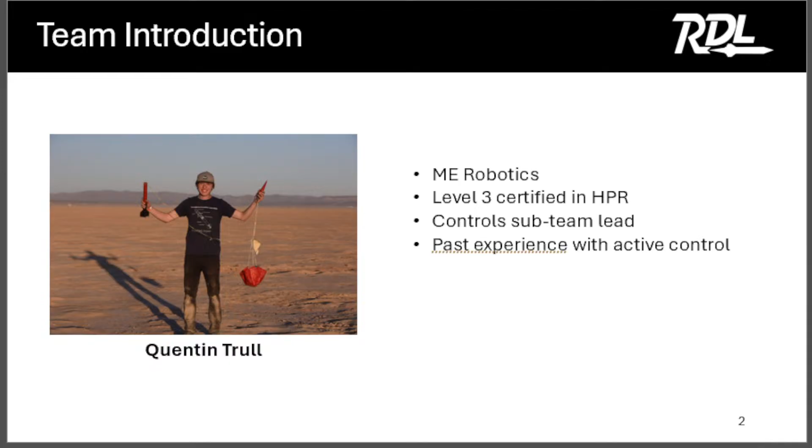And if you don't know me, my name is Calvin. I'm a student here at Embry-Riddle studying cyber intelligence and security. I have a pretty extensive programming background, programming for different projects, mainly ones that Quentin over here has roped me into. For this project, I wrote the flight software that controlled the flight. I have past experience with active control, and for this next season, I am the 2026 team lead.

All right, so what is the IREC competition? IREC stands for International Rocket Engineering Competition, and it's where a bunch of colleges all over the world come together to try and solve a common goal and compete and see who wins. There's a few altitude categories, so you can compete in 10K, 30K, or 45K. The altitude is your target. The goal is to reach a target altitude without going over or under it. So if you pick any of these target altitudes, that's what you're going to be shooting for.

There's also 2-stage categories for 30K and 45K. I don't remember if there's one for 10K or not. But in addition to all the altitude targets, there's also propulsion categories. You can compete in solids, hybrids, liquids, and also SRAD. SRAD stands for Student Researched and Developed. So you can do an experimental custom motor of any of those propulsion types in addition to the commercial ones. And the goal is to reach the target altitude without going over or under. You get a higher score if you're closer to it in either direction.

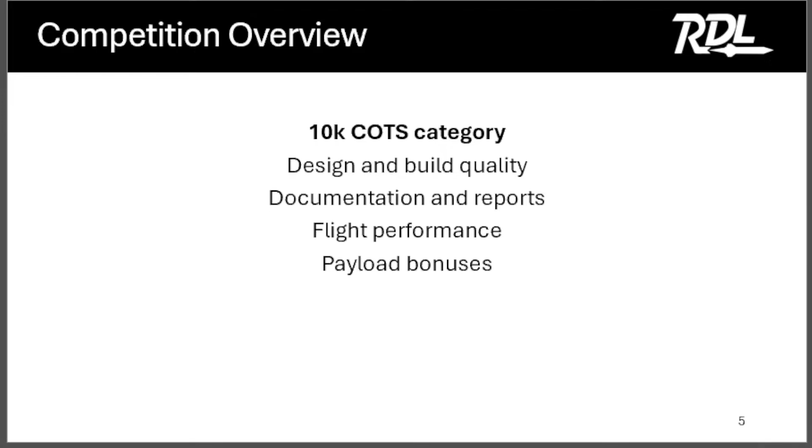All right, so in 2024, Embry-Riddle Prescott competed in IREC. It used to be called the Spaceport America Cup, but it's no longer at Spaceport America. And they used passive control. So it's just like a regular high power rocket. It goes up, you change the weight of the rocket to try and reach the target altitude, and you really focus on making sure your simulation is high quality to see how close you can get to the target.

Can I interject one thing? One of the things about solids: the performance of that rocket is highly dependent on the temperature of the grain itself. Yep, all sorts of variables with it. Some advantages though is that it's way simpler. So there's not a whole lot of failure points, and a lot of people, especially teams that are new to rocketry and don't have a whole lot of experience... that doesn't really apply to us.

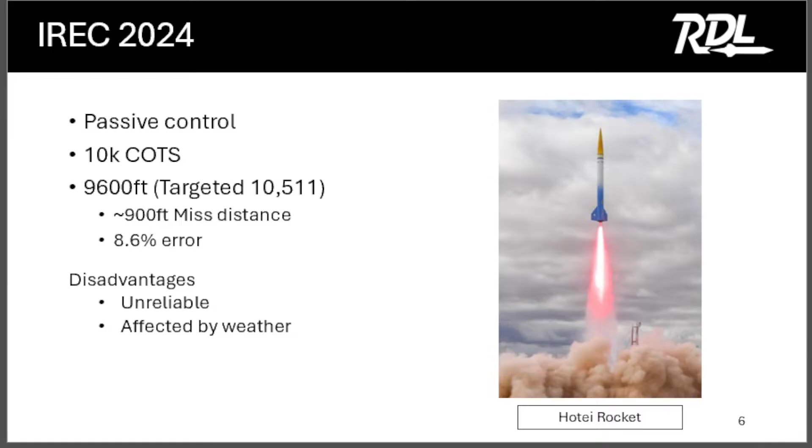It's really good for those teams because they can kind of get into high power rocketry that way. For the 2025 competition, we decided to use an active control system. We were still targeting that 10,000 feet goal, and we were still using a commercial off-the-shelf motor. Our flight performance, though, was significantly better over the 2024 season. We reached an altitude of 9,756 feet, and we were targeting 9,800 feet. So that's a very significant improvement.

We were only 44 feet off of our goal, and the error for that is about 0.45%. Some of the disadvantages to this is obviously adding an active control system. There's a computer on the rocket. That adds a lot of complexity. There's also more failure points. If any of those things fail, then the whole flight can be a failure.

But some of the advantages, it's so much more adaptable. It can adapt to changes in weather as you go up in the atmosphere, and also your motor performance. And in addition to that, it's repeatable. After the system is tuned, it should be able to fly to the same performance level basically every single time. And on the side, we have a picture of Brake Check rocket, which is this year's rocket.

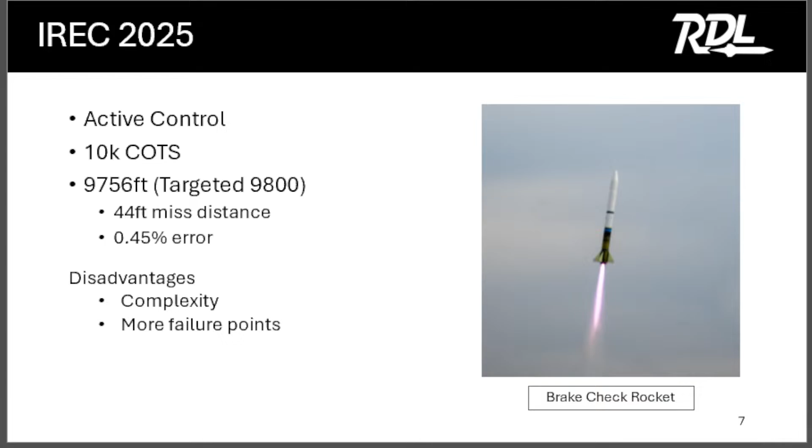All right, so this is an image of this year's IREC rocket, the 2025 IREC rocket. It's in a program called Open Rocket. How many people here are familiar with Open Rocket? Okay, great. So most of you. It's what you use to simulate high-power rockets. I'll talk about it a little bit later. We broke the rocket up into a bunch of subsystems. So I'm just going to kind of go over what the subsystems are.

The first one is payload. So this is to compete in the payload competition. The payload was located inside of the nose cone this year. The next one is recovery. So recovery is located right underneath the payload. That's where you have your recovery electronics, your drogue parachute, main parachute, and making sure that you get the rocket back in one piece. Structures, it's kind of everywhere because it's the structure. And so that's just the airframe, the fins, all the couplers, all of that stuff is handled by the structures team.

And then the control system, it's this thing. It's located right above the motor. That's so that when the air brakes open, it doesn't affect the rocket stability as much as if it was further forward. And then, yeah, the last one is propulsion. So that's the motor. In this case, it's a commercial motor. We did initially try to make a SRAD motor, but we had a mishap, so it didn't end up happening at the competition.

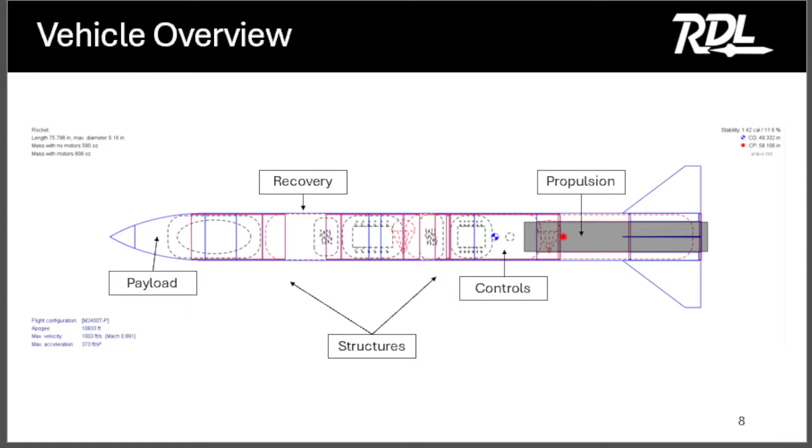For our payload section, we had a live video downlink system set up. It uses an FPV drone camera to capture footage and then a series of antennas to beam it back down to us on the ground. This is an improvement from our 2025 setup. We're using better cameras, better antennas, stuff like that.

Some of the challenges for this system are maintaining connection. The camera is very small, that is the entire thing, and it has no onboard storage. So if we lose connection, we just kind of lost that footage. Also, the camera can overheat and obviously shut down, and that's not great. And unfortunately, this payload was not compliant with the competition rules. We were a little bit underweight, so we lost some points in the final competition for that.

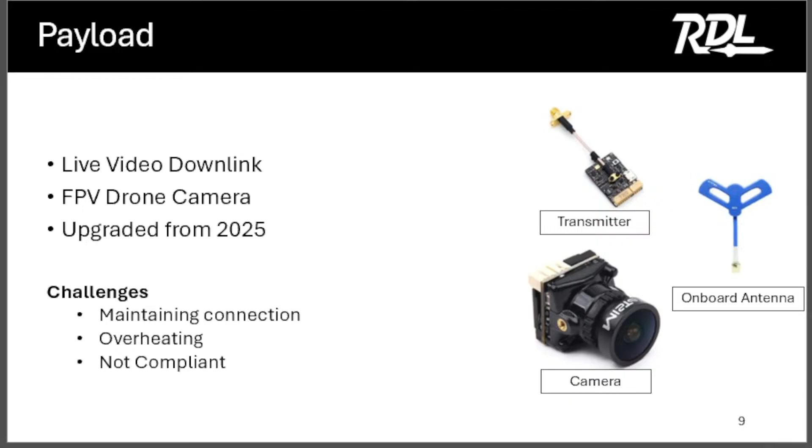All right, so for structures, the big thing that made structures difficult was that it was all student researched and developed. So we made all the body tubes and a lot of the fin can section out of student researched and developed parts, and that added a lot of complexity. The requirements were it needed to stay above 1.5 calibers of stability. So if you guys haven't done it already, you'll learn that that's the distance between your center of gravity and your center of pressure, and it's measured in body tube diameters. So in this case, those two values need to be 9 inches apart to be compliant to the rules.

It also needs to withstand the operating stresses. So it's a rocket, it goes pretty fast. This one, I think it went about Mach 1. So nothing outrageous, but it still has to be able to handle that. And it needs to be constructed of lightweight materials. That's so that we can use a smaller motor so that we don't have to spend as much money to do each test flight, because motors get really expensive at this scale. It's like $600 or $700 a flight.

Some challenges that the structures team faced: it was all new build techniques, so they had some bumps in the road working with these composite materials. There was also some fin damage during some of the test flights that they had to repair. And yeah, SRAD manufacturing is pretty difficult. So they had a multitude of hoops they had to jump through to make that happen.

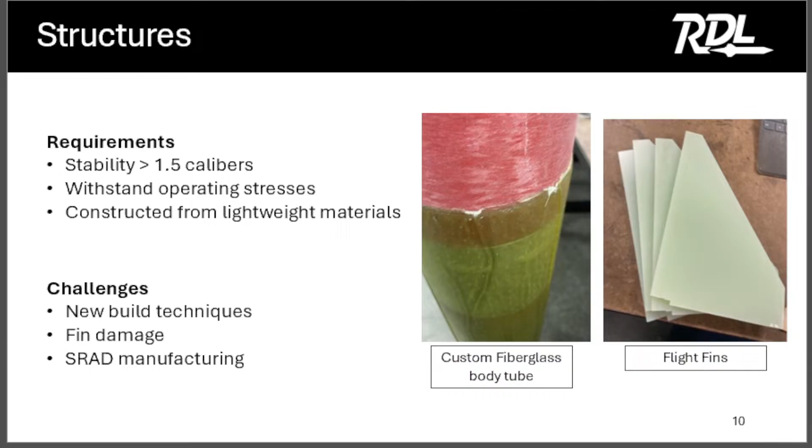All right, and then for the recovery system, some of the requirements are it needs to be dual deployment. Does anyone here not know what dual deployment is? Okay, great. So dual deployment is when you deploy a drogue chute at apogee, which is the highest point of the flight. That's a tiny little parachute that makes sure the rocket doesn't accelerate when it's coming down. And then when you reach a certain altitude, it deploys a big parachute. That's so the rocket doesn't drift as far away, because if you deploy this giant parachute at 10,000 feet, you're going to be walking like 5 miles to go get your rocket. So that's one of the competition requirements.

And that's so that you can find your rocket, because especially at IREC, you're not able to just immediately walk out to go get your rocket. You have to wait. In our case, how long did we wait? I think we waited like 5 hours from once the rocket got on the ground to actually go pick it up. Yeah, and if you don't have GPS coordinates, it makes it really difficult to find the rocket. And also you want live telemetry during the flight. You get that from the Featherweight GPS and from the TeleMega, which is a fancy altimeter that's super expensive and beams down telemetry data, so you know if the parachutes have deployed, how fast the rocket's moving, and all that fun stuff.

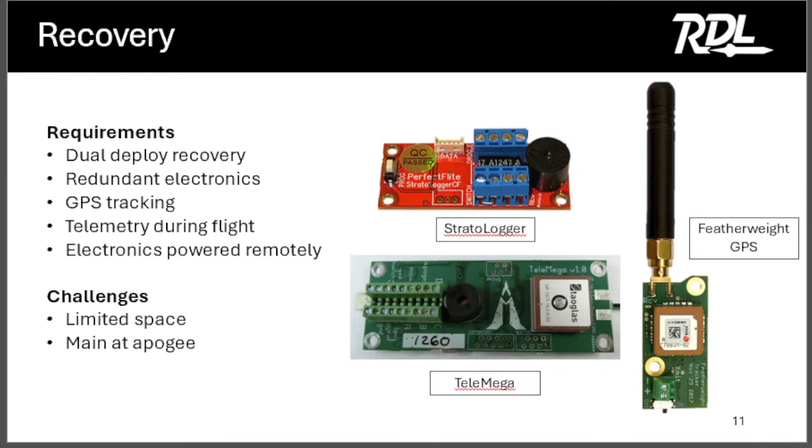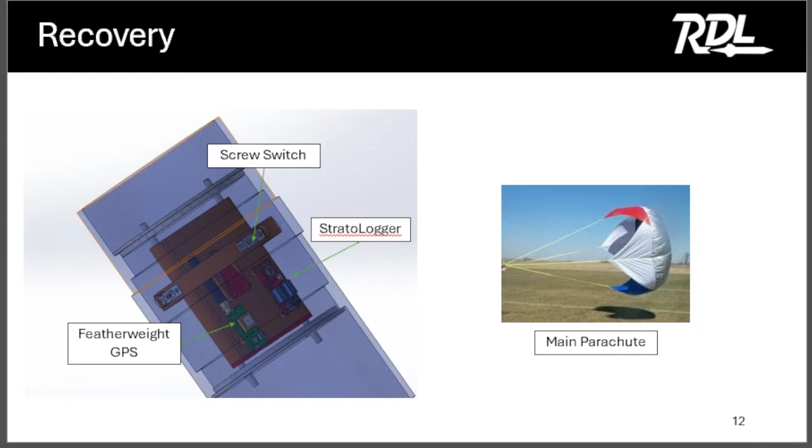For our propulsion system, we were initially wanting to do an SRAD motor. That's where you make your own motor, pour it, test it, do all that fun stuff. But unfortunately, we had a mishap during testing that forced us to switch over to a COTS motor. The requirements were to bring the rocket to above 10,000 feet. Because we have an active control system, we want some margin for it to actually do its job. So we have to be simmed to go above 10,000 feet, or in our case, whatever our target altitude was. We are using a COTS motor, and we need a thrust-to-weight ratio of greater than 5. Thrust-to-weight ratio helps a lot with the control system because it makes sure the rocket goes up straight, because all the equations we're using assume that the rocket is going relatively straight up.

Some of the challenges that this sub-team faced was obviously that testing mishap that forced us to switch to a COTS motor, and then also motor availability. One of the big appeals of an SRAD motor is that you can make them and build them for far cheaper than buying them. As Quentin already mentioned, they are around $500 to $600 each, and if you're buying them, that severely limits the number of test flights you can do. And obviously you want as many test flights as possible. There's also a shortage right now because military contracts exist and companies like those more than the hobby.

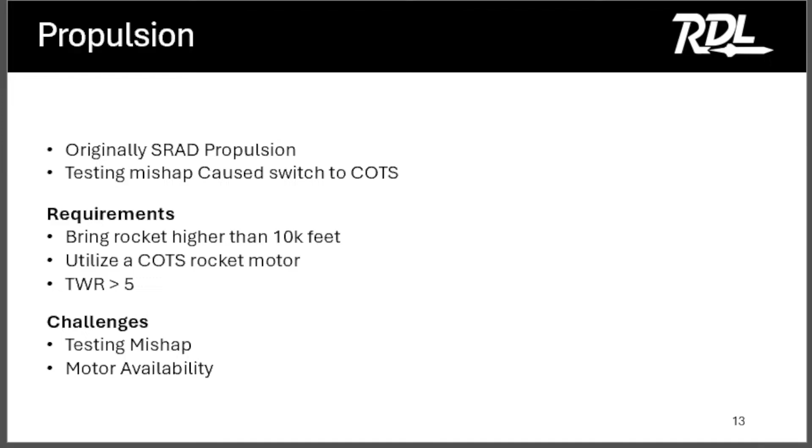Does anyone have any questions about what we've talked about so far? Quick questions.

What motor do you guys use? We use an M2400. All right.

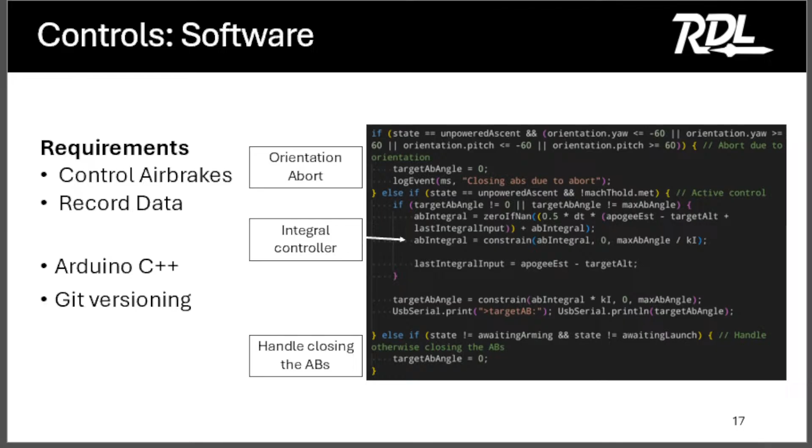We estimate our apogee, we track our orientation, we do some other orientation math. We handle state change as necessary. We'll talk about that in the next slide, I believe. And then we do any of the other extra stuff. So that's logging data, sending down telemetry, and doing state indication.

On our board, there's a buzzer and an LED, both of which are used to tell us humans on the ground what state the board is in, which allows us to make sure it's safe. So for example, if it's in flight, it will be beeping a specific sequence and the LED will be magenta, versus if it's on the ground waiting to launch, the LED will be green with a different beep sequence.

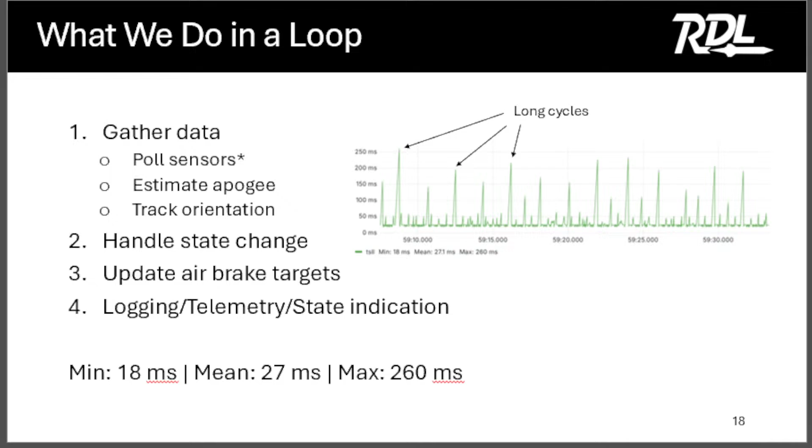Moving into state change, our first state is boot up. It's what we do at the very beginning when the flight computer turns on and begins its life. It sets everything up, and we do that in this setup state. Then we move into awaiting arming. This was added so that when the rocket is on the rail, it doesn't accidentally detect launch, which is what we saw in some of our test flights and other times using this board.

So at this point, it's open for serial debugging. That means we can use that radio and send it commands and do some debugging stuff, or we can plug in a USB and do those same items. We also start logging here. We log for the entire duration that the flight computer is on, just so we don't miss any data.

Moving into the next state, we have awaiting launch. So after somebody has manually sent a command over and armed the rocket, it is now ready to launch. It's trying to detect that. We're still doing data logging here, but after an acceleration or altitude threshold is met, we've detected that we've launched. So here we are also logging data until we detect burnout. This requires a time minimum, and it requires our acceleration to be lower than a threshold, or it defaults after a timeout.

After this, when we're in unpowered ascent and our speed is less than 0.5 Mach, this is where we're actually controlling the air brakes. This is where we're doing all the fancy math, opening them, and trying to hit our target altitude. Once we reach our apogee, which is the highest point in flight, the computer detects that and moves into the descent state. Here we make sure we close the air brakes. This is detected at a time delay, and it makes sure that we don't accidentally get the air brakes tangled in the parachute or any of the other lines that are being thrown out.

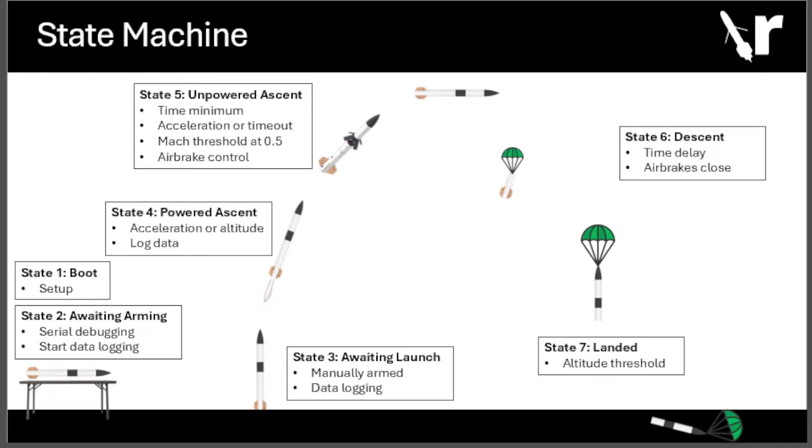And then finally, last state is landed. This one isn't technically necessary for our application because we don't really do anything different between descent and landed. It's detected over an altitude threshold, and it's when the rocket is on the ground.

All right. Now moving on to the hardware, which is right here, so it's easier to talk about. Requirements for this: the air brakes needed to deploy symmetrically. Can anyone here imagine why that might be a problem if they deployed not symmetrically? Yeah. So they pitch over, and that's not good. We have experience with that here at Embry-Riddle, unfortunately.

They also need to fail into a safe state. So the reason we have these brakes that come out like this is so that if something mechanically fails, they will force themselves shut. They won't stay stuck open and potentially cause that. Question, is it air loads that'll force them shut? Yeah. I'll talk about it in a second, but we did the simulations and found that the brakes will experience upwards of 80 pounds of force just from drag. So it's quite a bit.

And also the rocket needs to stay stable. So when the brakes open, you don't want the rocket to go unstable because you're moving your CP, and that's bad.

And so revision 1 here on the top, we originally were using a stepper motor, which is really good for knowing what the position of the brakes are and moving it super precisely. But we learned that the stepper motors aren't actually very strong, and 80 pounds is more than we were expecting. So we switched to a DC motor, which is what it is on now, and it's much stronger, and we'll talk about that in a second.

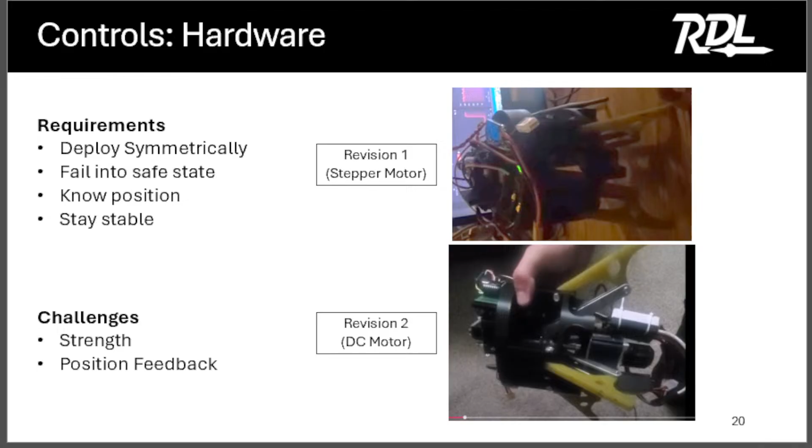So, anyways, going into the control logic now. Buckle up because this is where things get kind of intense. This is our control loop. First, we estimate what the apogee is going to be. So this is happening after the motor's burned out. We're coasting through the air. It's a lot easier to do physics when there's no external acceleration in the form of a motor. So we wait until that's done and it's coasting, and estimate what we think the apogee is going to be, because we want that to be 10,000 feet. So we need a reference point.

We subtract the target from that and that gives us an error. So if we're expecting to go to 10,500 feet, we subtract 10,000, then our error is 500, so it's positive, and we want to move the brakes in a positive direction to counteract that. That error goes into what is called an integral controller. Does anyone here know what a PID controller is? Sick. So this is like a PID controller without the P or the D term. It is just an integral.

For anyone here who doesn't know what that is, the integral takes the error and builds it up over time. So if you have a bunch of positive error and you're moving your actuator and the error is not going away, it'll move the actuator more to try and make it go away. So that's how our control logic works. It's pretty simple in this application.

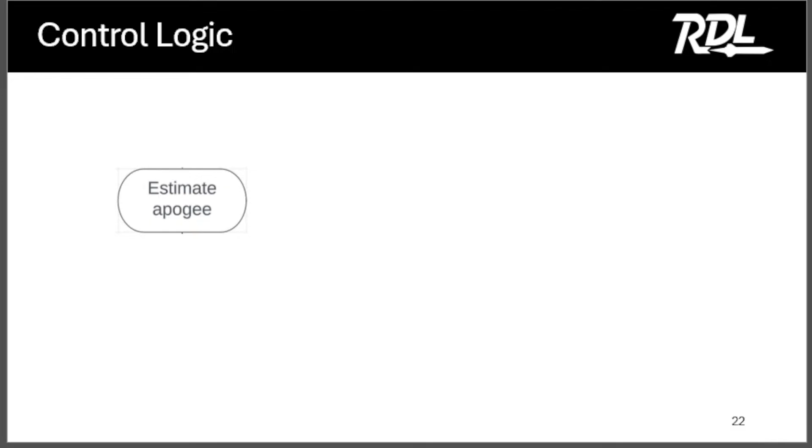Okay, now, how do we estimate our apogee? This turned out to be one of the most difficult problems to solve, because there's a lot going on with the rocket and you don't want to make too many assumptions; you want it to work in different conditions. So we used this equation to estimate our apogee, and I'm going to go through how we got each piece of this equation so that we could do the math properly.

So this is apogee. That's labeled incorrectly. This is the final altitude. So that's apogee, the final altitude. You take the current altitude and add it to the rest of that, and it'll give you your expected apogee. Burnout mass, we can calculate this on the ground before the rocket flies, so that's just a constant.

Current altitude, we collect this from the StratoLogger. So this is the commercial altimeter. This is where we are relying on the commercial altimeter instead of our altimeter, and that's what makes it so that we can get a more accurate score. Because it does not matter how close you actually are physically to 10,000 feet. Your altimeter just needs to think that you're at 10,000 feet, because that's how they score it.

This is gravity, everyone's favorite constant. Oh, by the way, we're in the metric system because it's better than the imperial system. Don't mix your units. Yeah, don't do that. We had a lot of problems with that. That's bad.

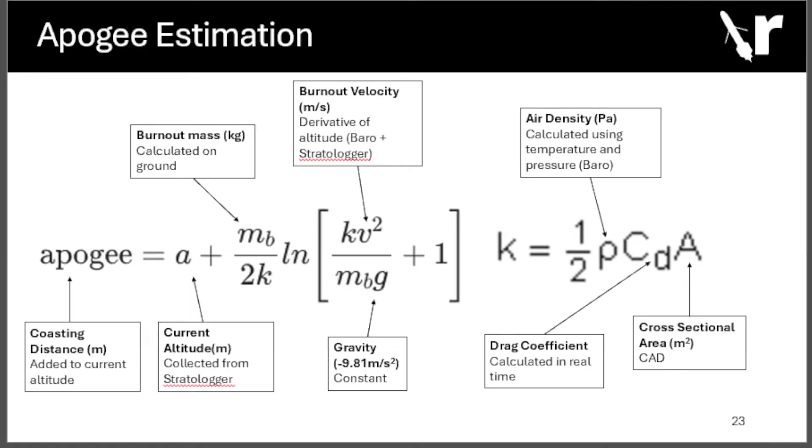And then drag coefficient. This is another big difference we made. Originally, we thought we would need to calculate our drag coefficient beforehand using a simulation tool like CFD or OpenRocket to know what the drag coefficient of the rocket is going to be. And then we realized that the drag equation uses drag force, and we have all this information. So we're able to actively calculate what our current drag coefficient is during the flight. So this is the equation for drag coefficient.

This P subscript D stands for dynamic pressure, which we calculate actively. This is the drag force. And again, this is the frontal area. It's the same value as before. We could probably simplify these equations, but we haven't. Almost certainly. We haven't done that yet. But we pre-calculate it the same way we do the other stuff.

All right, so now this is dynamic pressure. It's 1/2 rho v squared. So those look like familiar variables, right? And they are the same variables as before. So we calculate the density the same way, and we calculate the velocity the same way.

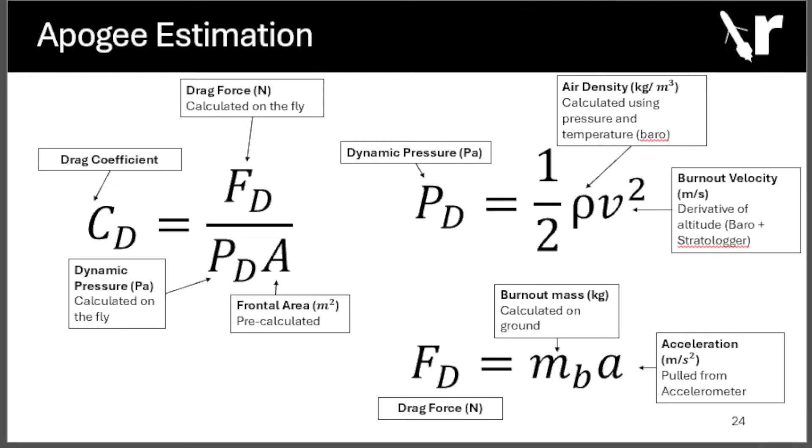And this is the drag force. We get the burnout mass, which is still a constant, and the acceleration, which we're able to pull from our accelerometers. So what drives our drag coefficient is data from the accelerometer, and it reads what the drag is on the vehicle. Any questions about any of that? Great. That's the only math in here, don't worry. I know some people hate math.

Moving into our first test flight, this happened, unfortunately, without all of our active control going, but we did get a chance to test the apogee estimation equations that Quentin just explained. For this flight, we had a couple different objectives. The first one was to gather data for us, our controls team. We flew with no air brakes open, and that allowed us to get a baseline of how the rocket performs throughout flight without our air brakes turned on. This proved to be very useful later on before our next test flight and then for our competition flight.

We also were able to test payload video downlink and proved that structures was good to go. We had only minor damage, and they were able to fix it fairly easily. We also recovered successfully, which is really awesome. We got our rocket back and didn't plunge it into the earth and have to start from fresh. Super awesome. Successes, full recovery, amazing. We also successfully collected data. Controls did our job, we got that data.

Unfortunately, we did cone pretty hard. That occurs in flight when it does weird aerodynamic stuff that I'm not qualified enough to talk about. We moved around in pitch and yaw. Yeah.

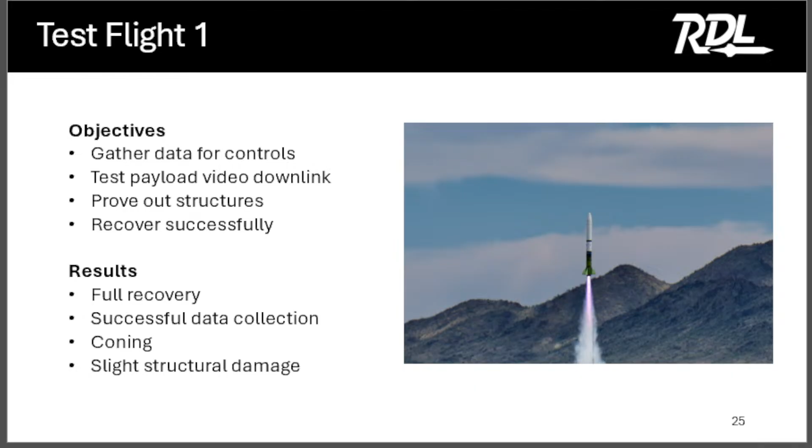Did you get the good drogue deployment before the main with this one? Yes. Everything worked as expected on this one. And as said, we had some slight structural damage, but the structures team was able to fix that. All right. Any questions about the control logic?

Sweet. Flight simulation. This is also very important because motors are $700. You can't really rely on doing like 30 test flights or you're going to be out of money.

I wish we had money for 30 test flights. Yeah, that'd be great.

So one of the most useful simulation tools we use is called OpenRocket. Like I said before, it's the most commonly used program for subsonic rockets. Is everyone here doing their level 1 with the hobby rockets? If you're not, you should. They're giving free kits away. That's great. So if you learn how to build a rocket, you'll be using OpenRocket.

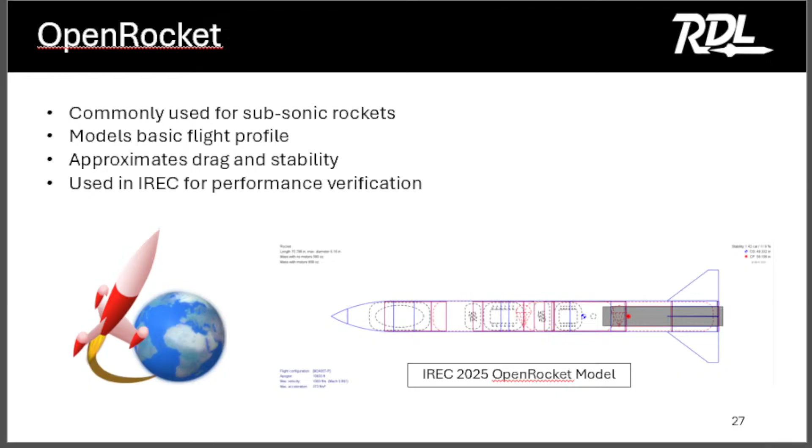It just simulates the flight, tells you what the altitude is going to be. You can move around the CG and stuff, and it's really useful for learning about rockets. We used it in IREC for performance verification to make sure that we knew the rocket was going to go above our target altitude, so we actually had some room to work with, and we could bleed off the altitude and reach the target. The next flight simulation ability that we had are what we call flight replays.

So on test flight 1, we were able to collect data. We can just feed that right back into the flight computer and make it think it's flying. The control system won't actually be able to impact the numbers because we're just stepping through a file of numbers, but we can test other things such as logic in the code and making sure that it's actually doing its job. In other rocketry projects we've done, there have been simple coding issues where it doesn't add commas in your data file, and then all that data is garbage. Flight replays are able to catch those types of issues.

Uses real-life physics. Can capture issues, and it only requires flying once. As soon as we have that data file, we can replay that file as many times as we want for literally only the cost of electricity. And on the picture right here, you can see one example. On the top is data we collected from the Stratologger, which is that commercial altimeter, in flight.

And as you'll notice, it's very noisy. It goes from the actual altitude down to between 0 and 100 really frequently. And that data is practically useless to us on the ground or in flight. But because we had flight replays, we were able to test different filtering options, and we were able to get it down to the graph you see at the bottom, which is phenomenal.

Disadvantages, as I said, it can't actually simulate the changes that the control system is doing on the data because it's just stepping through. So it can't actually simulate the air brakes doing anything. And it also results in, what do you mean on this one? Oh yeah, it only applies to one set of data. So if there's something weird with the data you collected, it could cause issues when you fly the rocket and get different data.

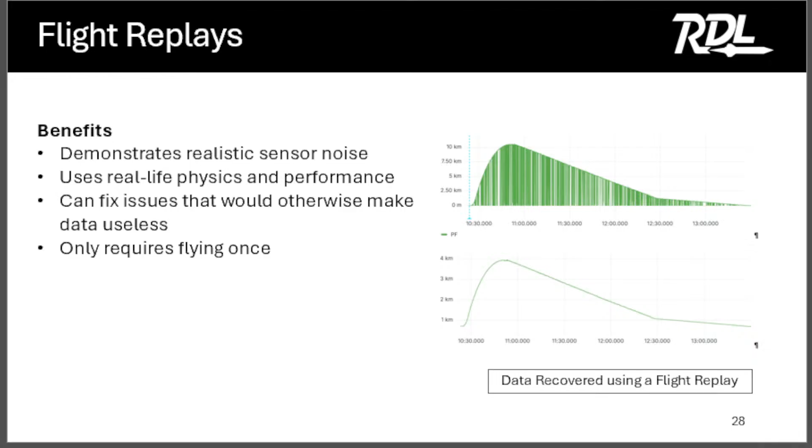This is a graph of our apogee estimation after doing a bunch of flight replays. Didn't we do like 200 flight replays? At least. Yeah, which is very expensive if we bought 200 motors. The green line that's spiking around the solid blue line is the apogee estimation, and then the one that comes up that also appears to be green, this is a terrible graph, is our altitude.

So you can see as we approach our apogee, the apogee estimation gets better and better, and it's practically on that line. And that solid line on the top is what the actual apogee was for the flight. So you can see we got it to be pretty reliable in that regard.

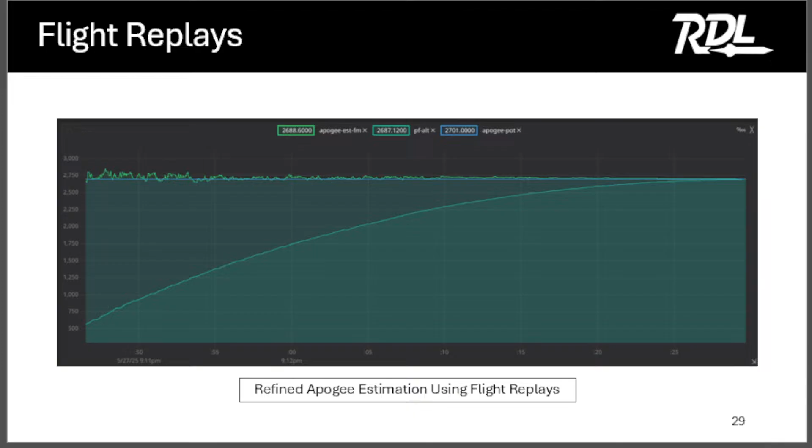All right, next simulation method, Simulink. Has anybody here used Simulink? Has anybody here used MATLAB? Okay, so for all of you who have used MATLAB, Simulink is like MATLAB, but you get a bunch of blocks and they each execute MATLAB code in a block diagram, and it's really useful for simulating stuff. So that's what we used here.

The difference with this simulation method is we're actually able to simulate what the air brakes do. So they can actually affect the flight and we can see the results of that, and we don't get that in a flight replay. Disadvantages: there are not realistic levels of sensor noise. The simulation assumes that everything's fine and perfect, but the world is never perfect. There's actually a lot more noise when you do real flights. For example, your altitude is just a perfect curve. But you can do all the air brake math with it, and it's great.

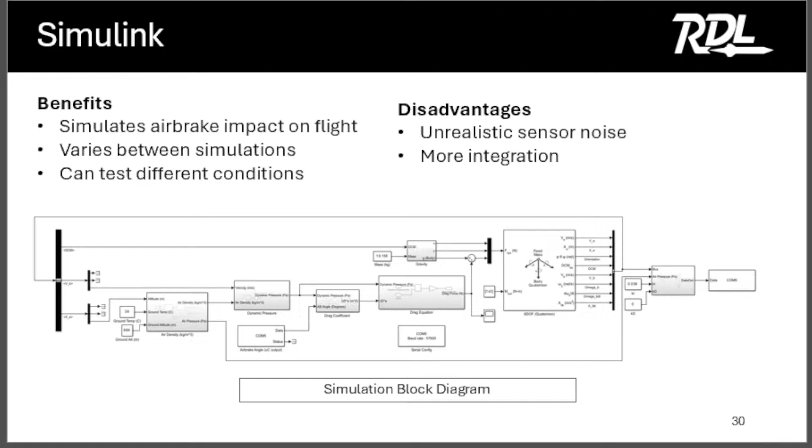So this is how the Simulink model works. In this case, it's called software in the loop or hardware in the loop testing. So it's where you have your actual flight computer in the loop that you're simulating. So very similar to a flight replay, the way this works is it takes the Simulink simulation. So the way that starts is you give it a set of initial conditions.

This simulation only simulates the coasting period of the flight because we wanted to simplify it and we don't want to have to worry about dealing with the acceleration of the motor and all of that because it could cause us to get bad data. The only part we care about is when it's coasting.

So you give it a set of initial conditions that you can get from a real flight or from an OpenRocket flight. And it's like, at this point in the flight, this is what we expect all the velocities and positions to be on the rocket. You input that into the simulation, it runs, and it's just a physics model, so it just runs, carrying up to apogee, and outputs all of the position data.

So we do the control gains, and then also take state information like the position and the velocity of the rocket out of the Simulink model into the flight computer. And so again, the flight computer thinks that it's flying, does all of the math as it would in a real competition flight, and tries to move the air brakes.

And so it does all the math, generates an air brake angle. That air brake angle goes back into the Simulink model on the other side, and the model simulates what the air brakes actually do to the flight. Does that make sense to everybody? Any questions about that?

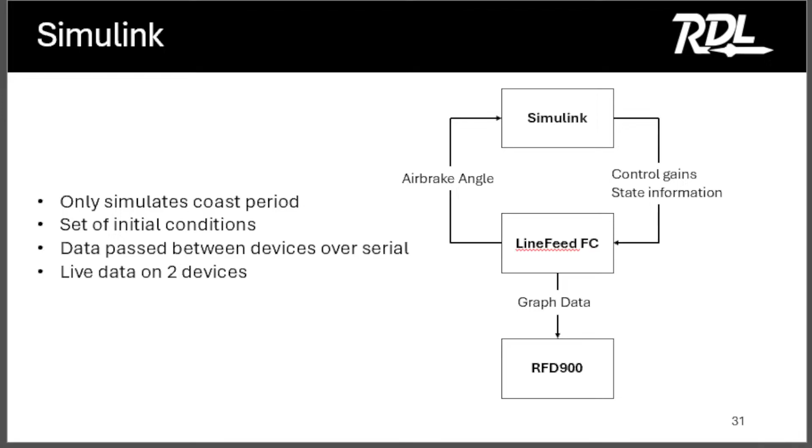All right. So drag modeling. How do we know how much drag the air brakes are going to produce? This proved to be a pretty difficult problem. The way that we chose to solve it is we have an if statement that takes the air brake angle that it's getting from the flight computer.

If it's 0, then we use data from test flight 1 as the drag model. So we have a curve fit so that it knows what the drag was during an actual test flight and uses that for all the physics. And then as soon as the brakes open, it uses a lookup table that we generated that changes the drag based on what we expect the air brakes' performance to be.

The reason that's super useful to have it separated like that is because we can put this gain on the lookup table, and we can change how effective the brakes are. So whatever model you use to simulate how effective your air brakes are going to be, it will never be perfect. That's just how it is. Even if you do CFD and spend hours on it, it's never going to match what real life is.

So you need a control system that can handle those differences, and we're able to simulate those differences so we can have a control system that handles those differences. Does that make sense to everybody? Perfect.

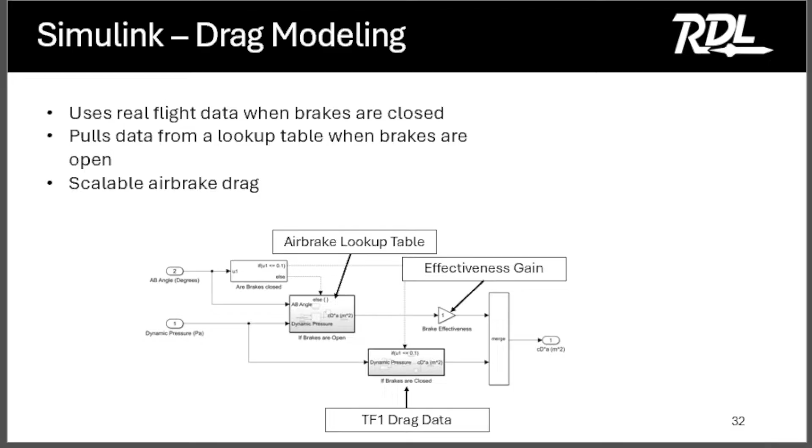Yeah, so generating the lookup table. To generate the lookup table, we initially wanted to use CFD. Unfortunately, because we are engineering students here at Riddle, we procrastinated and ran out of some time. CFD takes a really long time. It can produce really great data, but it's also fairly slow.

And we only needed a rough approximation of what our CD would be to make this very fun 3D lookup table. So I had the privilege of running 100 plus OpenRocket simulations in a car while we were driving to test flight 2 to generate this 3D lookup table. That was able to be plugged into the Simulink model, and was used in the event that the air brakes were not 0. And just so you guys are aware, the inputs to this, does everyone here know how a lookup table works?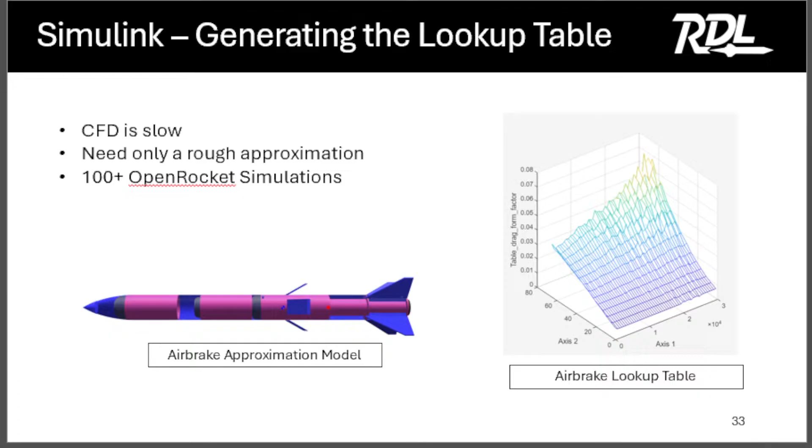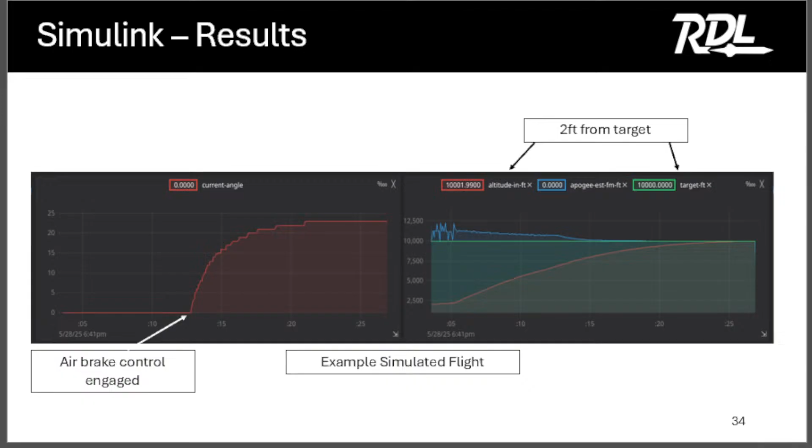This brings us into our other flight test. So for test flight 2, we had some other objectives. We wanted to gather more data for controls, and we wanted to give controls an opportunity to test the air brakes in flight. Here is a video of it. This was at LDRS in Fresno, California. It's gonna be really hard to see.

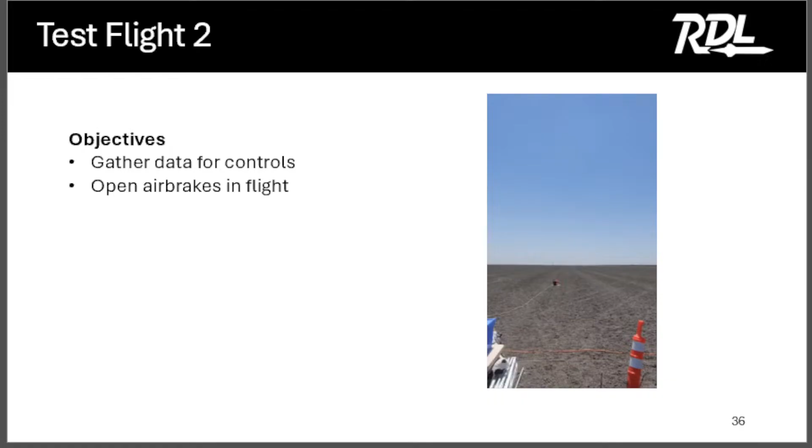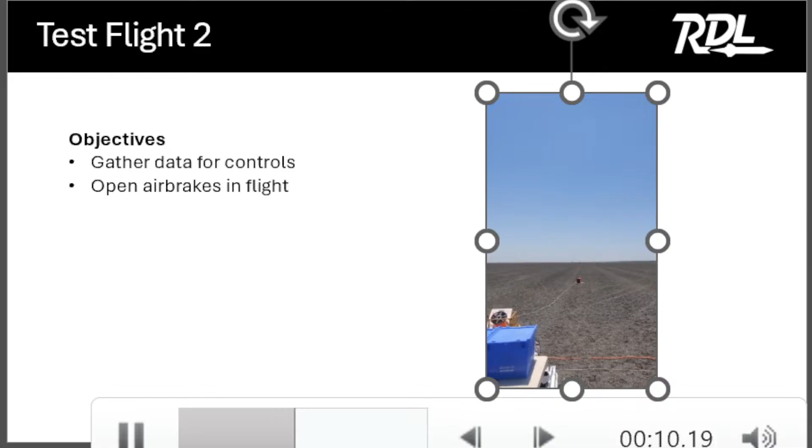So, the way that we found out how much force the air brakes needed to handle is, I think this was a question earlier, is we ran Simulink simulations where the brakes are actually opening and had one of the outputs on the flight computer calculate what the drag force is because we have all that information. And then we plotted it and saw what the maximum drag force was under varying conditions of drag, and that was roughly about 80 pounds. So we knew that they needed to handle at least 80 pounds.

So to humor that, we were like, yeah, we're gonna test the stepper motor. Again, this is like a week before the competition. So we get the air brakes, we set them up on our kitchen table, we put an upside down sand bucket on top so it's hitting all 4 air brakes, and then we take like a 5-pound dumbbell and put it on top and try to move the air brakes. And they immediately snapped closed. They did not work, could not move even 5 pounds, which was really fun to find out at this point in the timeline.

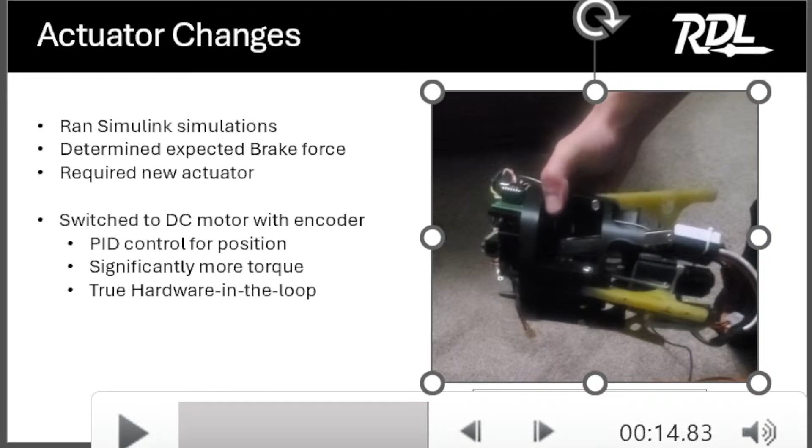You had a little hardware problem too, didn't you? Yes, the encoder. We heavily modified the encoder. We cut the encoder in half, drilled a hole in it, and glued something to the spinning part because it was too big to use the real thing. Team, don't do this. And then the night before the competition flight, that part that we glued in broke. So we had to try and fix it, and that was one of the sources of our lack of sleep on the competition flight, which we're going to talk about now.

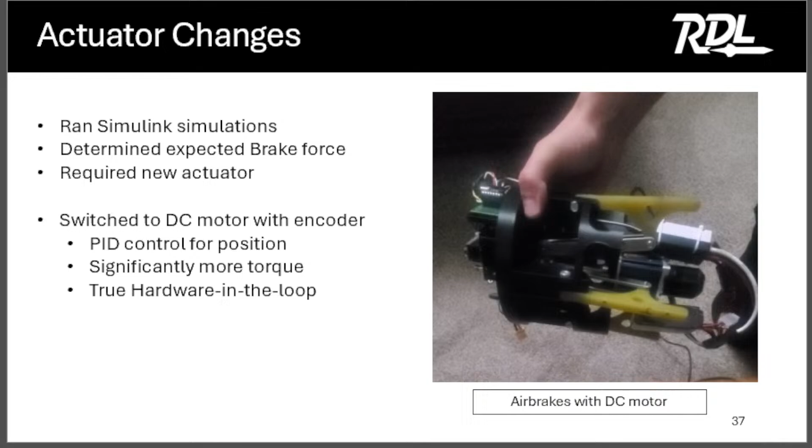Yeah, so competition flight. Changes we made for this competition flight. The biggest one is that we changed our target altitude. In the many long nights before the competition, we did a bunch of sims. We were trying to tune our control system a little bit better, and we were running into a problem of just not reaching enough altitude. So the decision was made to lower our target altitude from 10,000 feet to 9,800 feet. That does technically lose us some points in the main category, but we had already missed a ton of points, so we were mainly focusing on the Barrowman Award, which I at least am really glad we did.

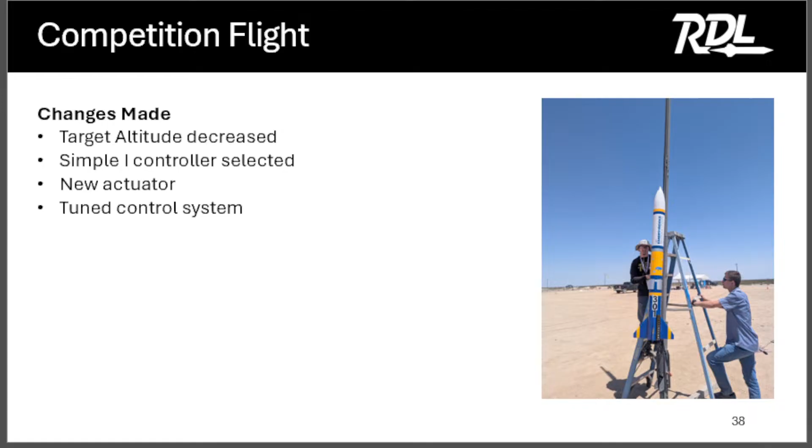We finally selected our control algorithm. We had that new actuator in there, and we tuned the control system, as I said. So this is one of the examples of the flight data we got from the flight. As you can see right here, our air brakes actually start opening. That is after the Mach threshold was engaged. And you can see there's a little bit of jitteriness immediately afterwards in both our apogee estimation and our target air brake angle, and that is due to barometric noise inside the rocket.

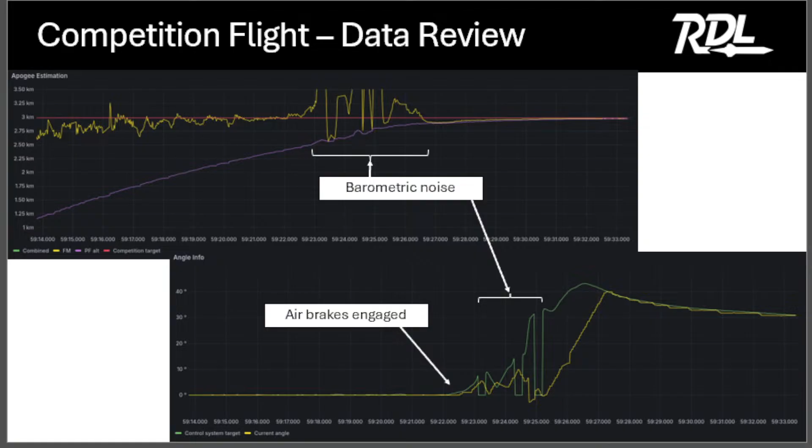The problem was we didn't have the compartment between the sensors and the area where the air brakes open sealed off properly. So as soon as they opened, a bunch of air did air things and made it get really confused. But it's fine because we were still able to use the air brakes. This is zoomed into the apogee estimation and altitude graph that you saw before on the top left. This is apogee estimation, right?

Yep. So this yellow one is apogee estimation, and typically it's a straight line. Because the brakes were moving, it was also moving, and brought us from down here, I think this is 200 feet away from the target, which is where it would have stayed if the brakes weren't doing anything, all the way up here to 55 feet away from the target. So that's verification that the air brakes actually worked.

So this graph actually shows an altitude difference of about 55 feet. We had two competition altimeters on this rocket, and the one that Controls was using was 55 feet off. The recovery altimeter, though, was 44 feet off, and because it was also a competition altimeter, we were able to choose which altimeter we wanted to use for scoring, and obviously we chose the one that was closer. This also highlights how different altimeters, even two of the exact same product made by the same company on the same rocket, can have different altitude readings. And I'm fairly certain our barometer was 100 to 150 feet away from what the StratoLogger gave us.

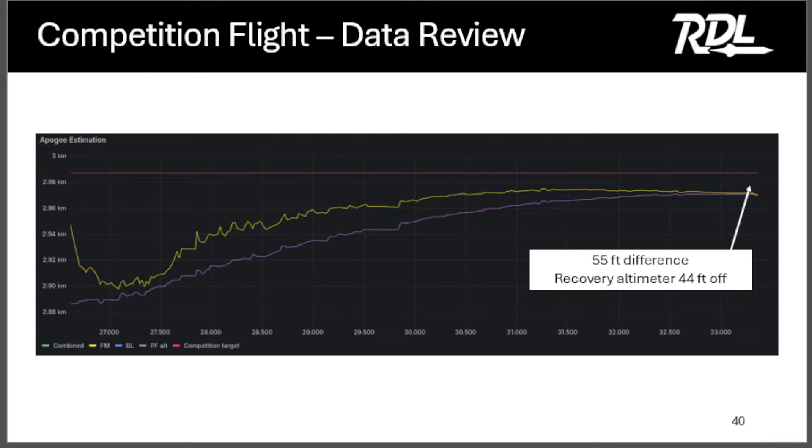All right, lessons learned. We learned a lot of them. So that's the competition.

The biggest lesson that we learned is debugging takes a really long time. If anyone here has worked with any sort of electrical or software system, you know exactly what I'm talking about. So do you want to talk about our stepper motor implementation?

Yeah, so has anybody here programmed a stepper motor controller before without the use of a control board? Cool, I'll save you the time. Don't. It's not very fun. It's so annoying. You have to manually flip a pin back and forth to make it step. And that not only is really annoying to program because it is blocking, that means you're not allowed to do anything else in the code while you're flipping this pin back and forth a bunch of times. You also have to flip it back and forth a lot of times.

So when we were initially doing the stepper motor implementation for this, we found a library, we implemented that, and we were testing it, and I was like, great, hunky-dory, this is all working great. And then I realized it was blocking, which means we totally can't use it, and I had to go back to square one. That was a really big, unexpected problem, and leads me into one of my favorite sayings, which is, in debugging, you can be 1 hour away from solving your problem for 24 hours in a row. Always a lot more time than you think you're going to need for debugging, because it's really easy to fall into that trap of oh, I'm so close, I just need to keep working.